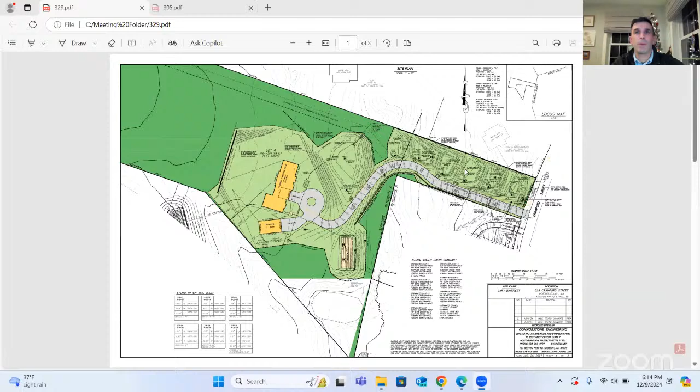So essentially from the last meeting, to address Vinny's comments, we've expanded up. Essentially, one of the biggest things we did was expand out a lot of these basins as they roll down the hill, so we can capture and infiltrate more runoff. So we have less runoff in the post-development conditions, far less than the existing condition, especially for the lower storms, the 2, 10, and 25-year storm.

We added in trench drains running across the driveway to help capture a lot of that runoff before it gets down to Crawford Street. Right now, these basins at the bottom, essentially the stormwater management system, will contain all runoff that flows to them through the 25-year storm. We begin to get some overflow during that 100-year storm.

We added in, just for reference, one of the comments the commission had, the driveway design from the abutting lot right down in there.

I think the only question I had was basically we updated the waiver list, and one of the waivers we had asked for on that list was about treatment for a portion of the driveway. This tail of the driveway right here does not flow to the drainage system, and it was noted in the review letter that treatment would technically be required. So we asked for a waiver from that standard for this particular portion of the driveway.

It's about 700 square feet, and it's designed essentially to sheet flow off into the grassed areas and then ultimately through the wooded areas. We still control the peak rate and volume of runoff in those directions. It's just treatment for that section of driveway.

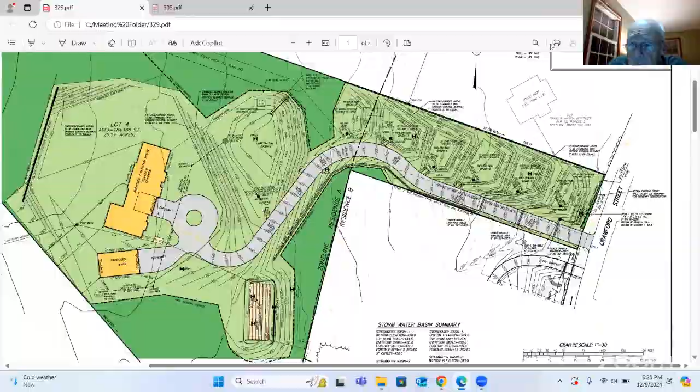Okay, so Vito, sounds like we're gonna continue this to January, yeah? Yep, that sounds fine. Great. We need a motion to continue the stormwater management permit for 329 Crawford Street to January. So moved. Is there a second? Second, second by Kelly. Roll call vote.

Justin Dufresne, yes. Todd Helwig, yes. John Johnson, yes. Kelly Marston, yes. And I vote yes. All right.

Well, thank you, have a good holiday, Vito. Thank you, you too. Well, I'll see you later. Good night. I have one at the end too. Okay, we'll see you then. All right.

Moving along to the NOI and stormwater management and land disturbance permit for Southwest Cutoff. I believe we have...

Mr. Lowell's with us, bring you in Robert. And Mark... I got a Mark Manganiello, LEC, yes. And Leslie Lombardi. Okay, Mark Manganiello, is there... Yep, Mark's coming in, Leslie's coming in. I think you should do that's it. There we go, gang's all here. Okay.

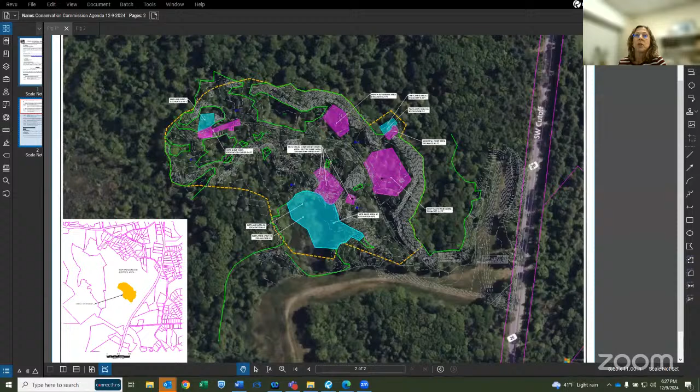And at that, I will turn it over to Mark. Mark, do you want me to leave this up or do you want to share? I'll share mine if I could. Okay, yep. I'm Mark Manganiello with LEC Environmental Consultants. I'm just going to get this screen going here. That work okay? Yes, I can see it now.

So just backing up a little bit to orient the commission and any abutters who might be watching: this is Route 20 here, this is the flood control berm you may be familiar with, Tomblin Hill Road, Davis Street to the north. The site is in this general area here. It's part of about 200 acres, as Rob indicated, a flood control area - this larger property that includes this flood control berm structure.

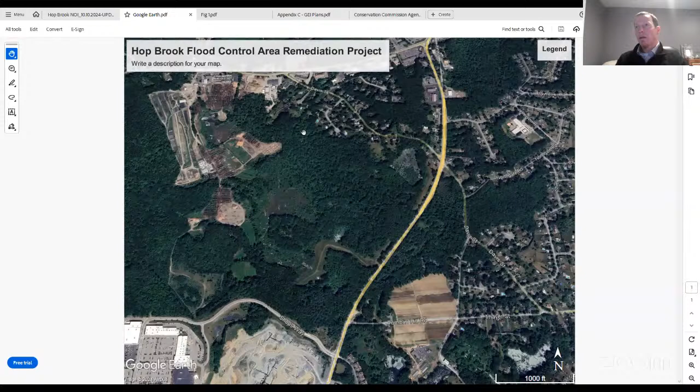Back to Leslie's graphic here, just to touch on wetland resource areas associated with this project - there's bordering vegetated wetlands, which were delineated in the field by LEC. That is this boundary that extends around the perimeter of this area, like so, extends off site here and then back on site here and back over this way.

So there's BVW. Mark, could you blow it up just a little bit? Sure, let's see. How's that? That's good, that's a little better.

There are also several isolated vegetated wetlands you can see on here, these small green outline polygons. Really the landscape in this area - you can also see some of the topography contours in here, they're kind of light on this but you'll see them on other graphics. The landscape has been heavily disturbed over the years as a result of the historic use of the property, so there really aren't any natural wetlands in here. These are all man-made features within the perimeter of this work area.

This area is also in bordering land subject to flooding, and one or two of the wetlands have been identified as containing potential vernal pools. The total amount of work involves 33,000 square feet of soil removal in bordering vegetated wetland, 66,000 square feet in BLSF, and 41,000 in buffer zone. The work areas are divided into 5 areas of contaminated soil and groundwater and removal of debris as required in the MCP. As Leslie alluded to, I'm going to pull up the site plan now.

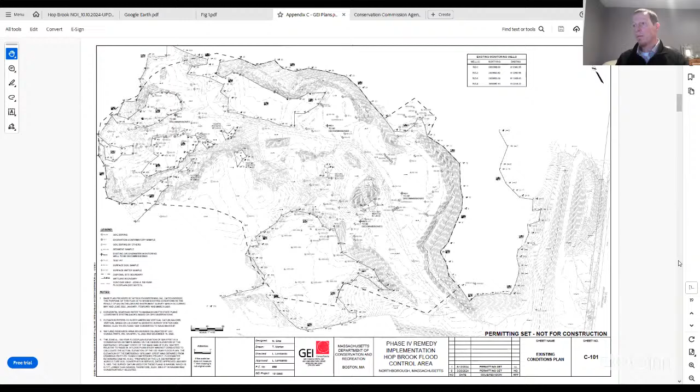This is a similar graphic to the one we were just looking at. These are the same polygons that had color in the previous graphic, showing areas of excavation, contamination, and proposed excavation. They're broken down as the wire dump area, the municipal dump area, electrical component, debris and bottle dump area, and north and south burn areas. Each one is labeled with square footage, depth of excavation, volume of soil to be removed, etc.

The largest area in your jurisdiction is wetland 3, about 28,000 square feet of wetland disturbance. Most of the excavation is down to a depth of 1 foot, with a couple of small pockets a little deeper than that.

The plan is for excavated soils to be temporarily stockpiled on site before being transported off-site. A portion will be treated in situ for lead toxicity through a process that involves mixing contaminated soil with a binding agent to immobilize the lead. The soil is then tested and excavated for transport off-site.

With the extensive amount of work in wetlands, measures to carefully manage water during construction were incorporated into the plan. There's extensive information in the plans regarding construction methods, including a plan to perform wetland excavation during the drier summer months to minimize disturbance from water. There will also be timber swamp mats for excavation in wetlands in Area 3, dewatering plans, and a water treatment system if necessary.

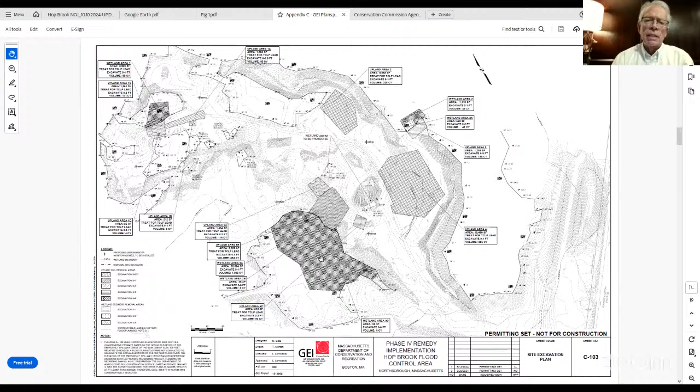That could have been it, my best guess. There was no equipment, it was just several guys standing around. Yeah, they may be looking at wetlands as well too, at the same time. Okay good. Yeah, Greg, you said it was Davey Tree, so there was an identification of emerald ash borer in that area.

So I think they were out looking at trees, looking for the emerald ash borer and possibly the Asian longhorn beetle. Davey Tree has been around the water, around town, all the areas around central Mass for years, looking at the longhorn beetle. And there was a sighting of, oh no, not the emerald ash borer, the spotted lanternfly.

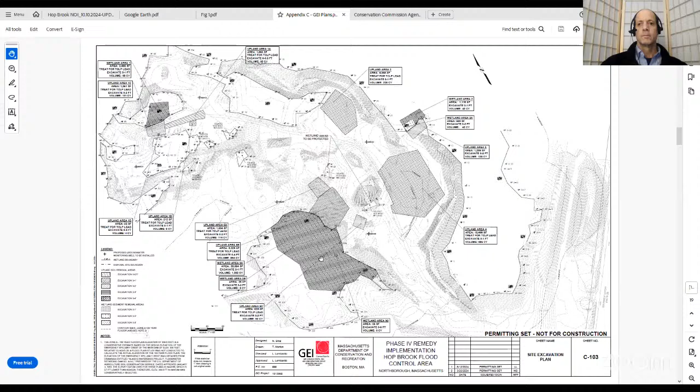That's the bug of concern this time. I just wondered, knowing this was on the agenda, I wasn't sure if it was related or not, so that's fine. Okay, I've got hands up in the audience.

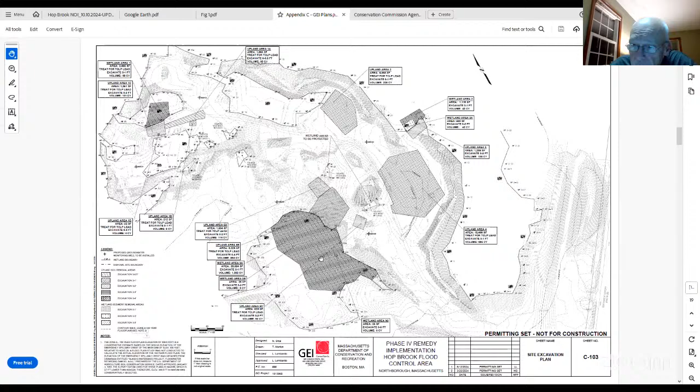Lisa Maselli. Lisa, I'm going to have you talk. Lisa, you there? Making some sounds, can you hear me now? Yes, we can hear you.

Hi, how are you? We're well. I'm supposed to be your liaison. It's been a while since I've been here, so I'm interested in the deed restriction that you talked about and keeping it. Is this going to be just used for recreation use and never again for residential, commercial, or industrial use?

Correct. Yeah, it was actually purchased for flood control purposes, so there was really never supposed to be any development on it. This was a pre-existing use when the state bought the property, the auto parts. But there are no plans for future development.

The restriction is for new drinking water wells, and Leslie could be more specific about that. But it's really about future uses of the area that we're cleaning up, which will be suited for woodland. It'll be fine for passive recreation, but it's not suitable for redevelopment. The cleanup criteria we're using does not meet residential criteria, but it's suitable for a passive recreational use.

So the deed restriction will restrict residential uses of that portion of the property. But just residential, won't it take commercial and industrial into account? When it was residential, it would cover all categories, Lisa. There will be no development here for sure. It's not meant to be a loophole to allow industrial.

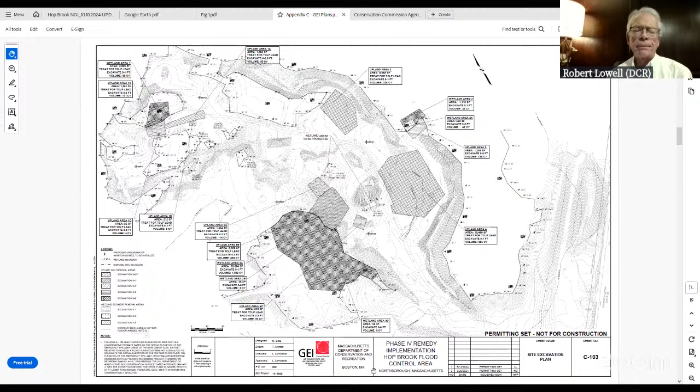Okay, that's right, because you don't really notice anything there since you're driving. There's a down gate, and then you'll see a grassy area. We keep it mowed all the time, but that's really the only activity there is the mowing. And there's a small pull-off there too, where a couple cars could pull off into.

You notice that? Okay, so it's on the west side of Southwest Cutoff. Yes, it is, on the way to Shrewsbury. Yeah, because it looks like there's a green gate of some sort, and then a big berm. That's right. That's a very attractive area when it's all green.

All right, great. I'm glad I tuned in—there's a lot of interesting things going on. Getting this taken care of is lovely. Thank you. Super, you all set with your question here? I am, thank you. Okie doke.

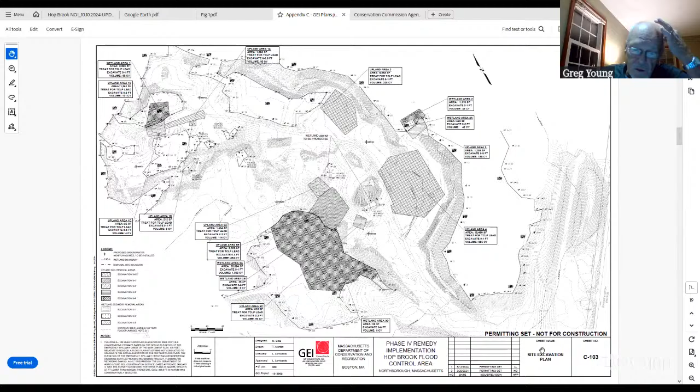All right, no other hands up, I see. Okay. So Vinny, if we have no other issues, we can move ahead to close the hearing and take a vote. That's correct, we close the hearing and then move on. Yep, I'll take one more look here since we had some putters. I don't see any hands up.

Okay, need a motion to close the hearing on the NOI and stormwater management land disturbance permit for 150 Southwest Cutoff. So moved. Is there a second? Second by Justin. Roll call: Justin Dufresne, yes. Todd Helwig, yes. John Johnson, yes. Kelly Marston, yes. And I vote yes. Hearing is now closed. Now we need a motion to issue a notice of intent.

Vinny, any special conditions on the NOI or the order? No, we just have our typical 25 or so conditions in our orders of conditions, and the permit has, I think, 17, but there are a lot of repeats. I don't see that we have any other—I didn't make any notes that we had any other conditions that needed to be applied to this.

There's no erosion control reporting devices here because we're in the wetlands we're working in, so—well, there will be erosion control or sediment control devices going up on the perimeter. So one of the conditions is our typical one: they have to be inspected and approved prior, before any other work occurs, and they can't be removed until the upland area is stabilized and approved. But that's one of our standard ones.

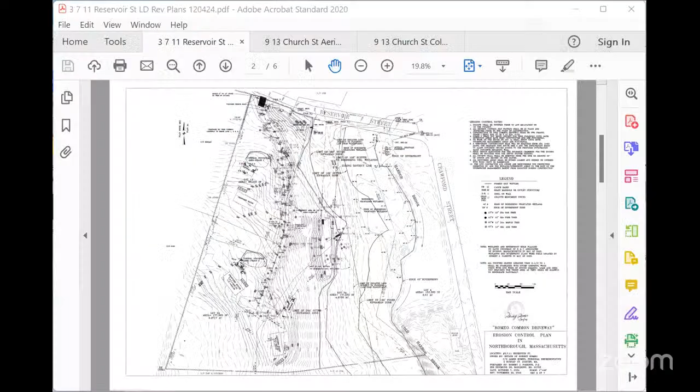So while you're doing this, some recapping from last month - I think there were a lot of outstanding questions that needed work done. Yes. So in the past couple weeks, I've cleaned up the drawings and I basically took the drainage information, the catch basins, the manholes, and put them onto the profile sheet, which helps clarify the grading plan a little bit. It was pretty confusing, and the grading, manholes and catch basins were coming out very light, so I transferred all that information above the profile sheet to help with clarity for everybody - for DPW reviewing it and Vin's review of it.

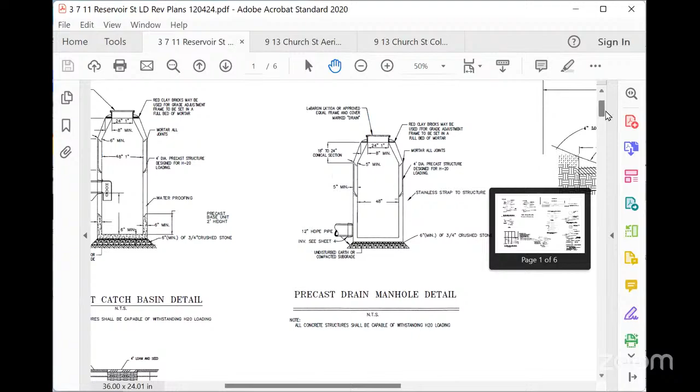Which sheet do you want, Bob? Maybe the erosion control sheet, Vin, we start with. Okay. This is the profile sheet, correct. Yep. You want to just explain the profile sheet?

Sure. So on the left side of the profile around Station Zero, there's the edge of pavement for Reservoir Street. So in order to comply with the planning board elevations - I think they have a limit of 6% coming in off the road - I got 5.99% on the profile coming in. Then we changed the grade with a little vertical curve to go to 7.2%, which is a little bit under their maximum grade, but it works pretty well with our profile with the existing center line grades.

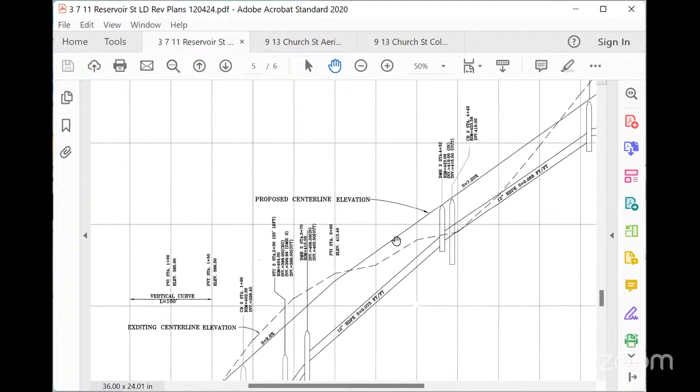I think it works with a little bit of cut in the 150-foot range there, but then we go to a fill section at about Station 4, where drain manhole number 2 is, I think. Yep, so we got a little bit of a 4 or 5 foot fill section in there.

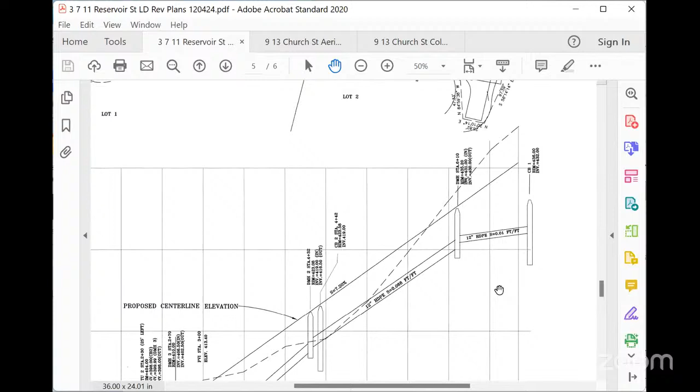All the drainage pipes are shown a little bit clearer on this sheet. There's one catch basin - the last catch basin on the far right of the profile sheet - that's actually in the turnaround for the common driveway, so we're collecting all the pavement runoff. So this drainage system is designed to catch the runoff from the driveway and anything from the lots that's not going into the recharge structures for the houses.

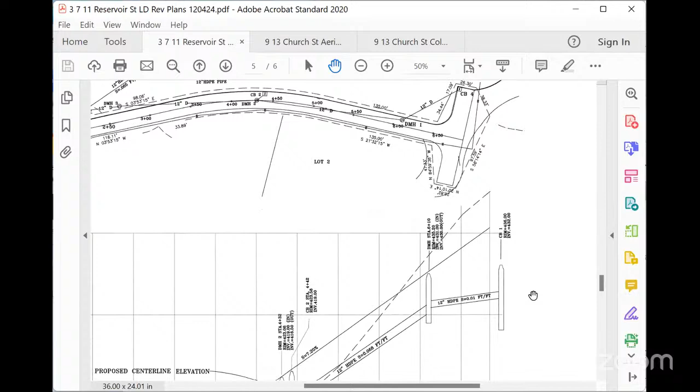We do have schematic or concept locations for our recharge for the Cultecs in front of the houses. They're not 100% designed, but I think LBAG has allowed for enough volume for the 25-year storm in those house recharge systems.

I think Vin had a question whether it would affect the septic systems. The soil perked pretty well up there - all the soil testing is done, so the recharge for each house will help reduce our volume that we need for our detention ponds.

There's a small detention pond up front - I think we talked about it, right near Reservoir Street here. The driveway comes up, is proposed to come up here with a detention basin in this area. And then there's the first house development there in this area - house with a driveway.

Septic system, yep. So we did show all the houses, the grading for the driveways for the houses - I kind of worked it out just to get an idea how much land we would disturb. I know Vin had a comment - I think I showed 2.5 acres originally, but that was more or less for the driveway and the 2 detention ponds. So I've estimated about 30,000 square feet of land disturbance for each house, so our total land disturbance is about 4.5 acres, according to my estimation.

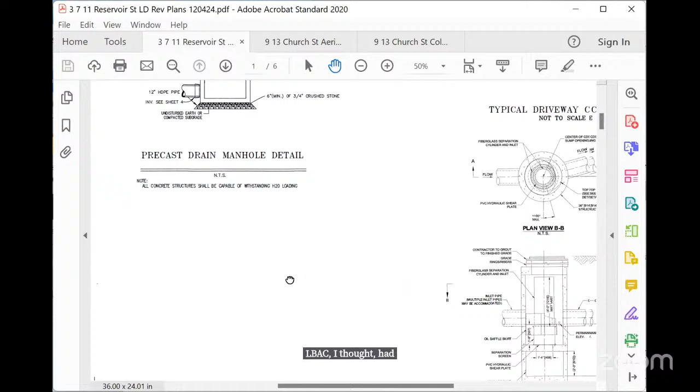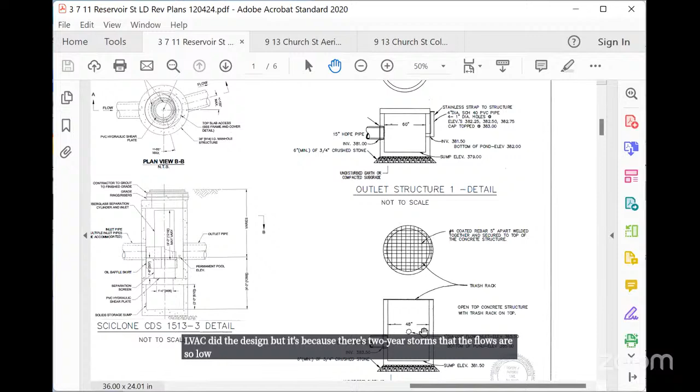I did add details. I don't know how much time you had to look at it, but I added the details of the outlet structures because they weren't in LBAG's report. I thought they were in there, but I did not see them. So there's two pretty much manhole structures with 4-inch pipes with holes in them. The reason I think they're 4-inch pipes, and LBAG did the design, is because in 2-year storms the flows are so low that that's just the way it's got to be. So if we did get a big storm, the water would just go into the top of these two structures, one in the middle of each pond, the infiltration basin and the detention pond out front.

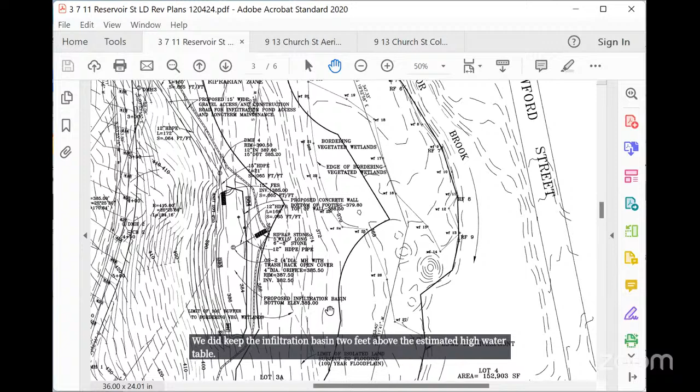So those details, I think, work pretty well. We did keep the infiltration basin 2 feet above the estimated high water table. I had hand dug a couple holes in the detention pond area, got down about 42 inches with a post hole digger about a year ago. I think those holes, I just covered them up with some brush and stuff, so they're probably still visible if anybody wanted to see them. But I think LBAG has done a good job keeping the elevations to where everybody will be happy with the final product.

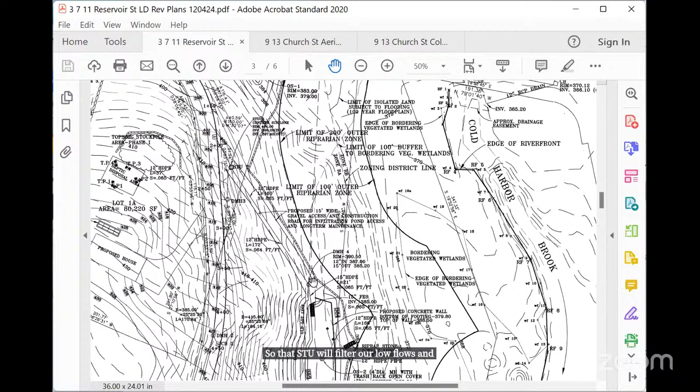Now, we do have a pipe that comes from our driveway to feed the detention pond. So from the drain manhole, we have an STU, a stormwater treatment unit, just off the edge of the roadway where the cursor is right now, STU 2, I think we're calling that one. That STU will filter our low flows and keep the silt out in accordance with the stormwater regs, and then we will drain to drain manhole 4, which just changes the direction a little bit, and we'll put another 15-inch pipe and let it discharge into the detention pond.

So that length of pipe will be our construction access to the pond, because we're going to end up pouring concrete for the concrete wall. And that construction road will have to stay, I think, for further maintenance. I think that's just going to end up staying a gravel road.

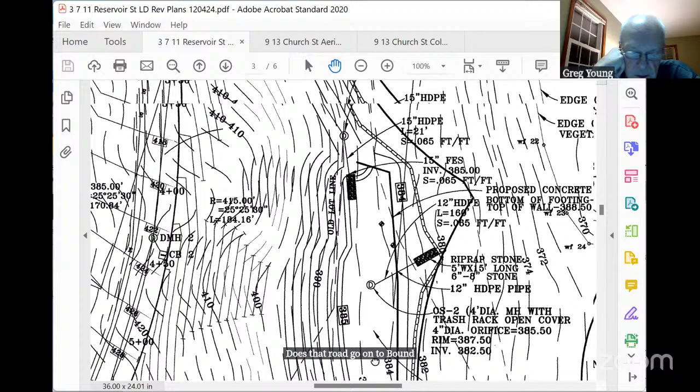Does that road go on to Boundary Street? I'm sorry, Reservoir Street? No, it's going to go up to our common driveway, just on the north side of drain manhole 3, maybe around station 2+00. I think those grades work pretty well, and it's not a crazy slope. It's probably a 9 or 10% slope.

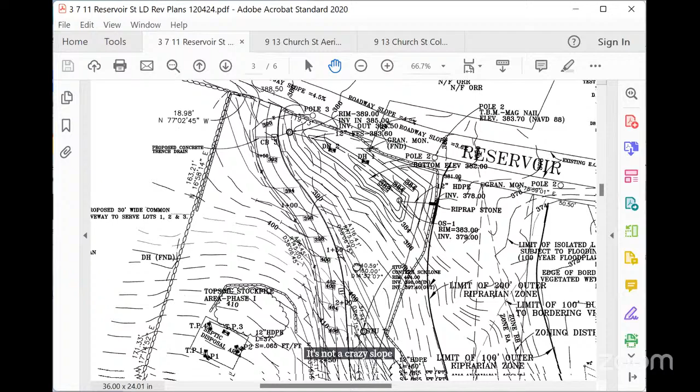So it's easily accessible. I think with those 4-inch low flow drains, maintenance will be maybe a little more required than some of these other larger ponds that just have a 12-inch pipe going out. I think the folks that live here are going to have to keep an eye on it.

Vinny, that brings up a point about folks keeping an eye on things. We don't have a great history with that. You probably want to have some sort of HOA involved here, right? Yes, the planning board has already requested that. Great. I'm hoping to get legal help with this thing to get that HOA paperwork in front of the planning board for review.

I did have a detention pond in my backyard in Marlboro, and I used to cut the grass in it with a rider mower. So this one should not be grass, the big one should not be grass. It should be basically a gravel bottom when it's done. The concrete wall, 12 inches high?

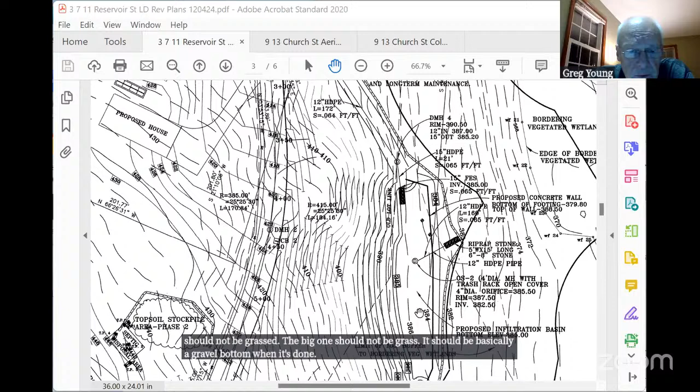Excuse me, the height of the concrete wall, yes, basically just to create our storage. So if I tried to grade out a berm, I would be going into the 200-foot line, so I would prefer this 6-1 option. I think cost-wise it's kind of a wash, only because it's basically just a house foundation wall when it's done.

And it does make us look better with the Conservation Commission, as far as not cutting more trees adjacent in the 200-foot zone.

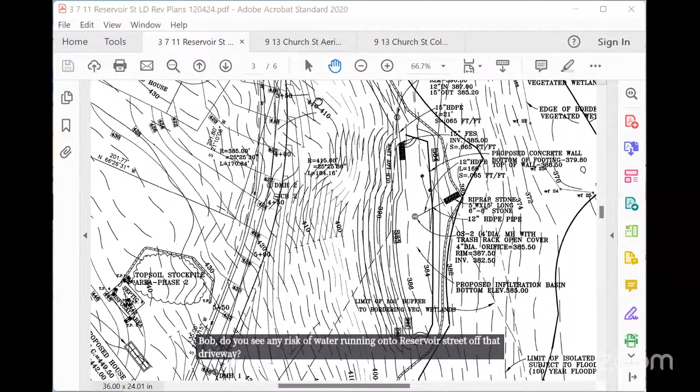Bob, do you see any risk of water running onto Reservoir Street off that driveway? So the catch basins, I did do a little catch basin analysis for DPW and for Vin, so we can collect all the water.

We did add a trench drain. So we have catch basin number 3 down about 30 feet off the edge of pavement, and I also added a trench drain. That one shows it in front, but it's actually going to be 5 feet to the north, so that anything that might go by that catch basin will get caught in the trench drain.

And then that D symbol on that plan is the other treatment unit that we'll have to purchase and put in. Okay.

Vinny, comments? You still need to do some analysis, yes? Oh, yeah. I got this I think last week, maybe Thursday or so, but yeah, I still have to look at it.

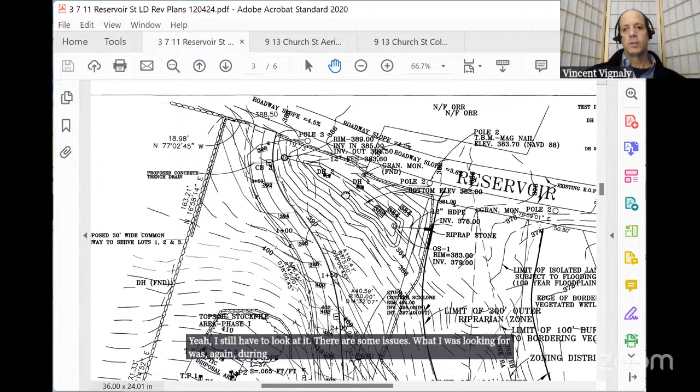There are some issues. What I was looking for was, again, during construction, how much needs to get protected, having temporary sediment storage so that before all these drain systems get put in, you're just going to have a cut road going up the slope. So we want to put controls in there so you don't get dirty water coming out into the street. You're going to divert it out to the basin on the side.

So that proposed basin out by Reservoir Street is pretty much a natural low area, so we can direct water there during construction. I don't think it's going to take much to do that. The topo is already kind of pushing it that way.

Right, and I just have to confirm it is. I think it can work, just have to go through and make it work. You have to build a little berm on this side, but this isn't an infiltration basin in the future, it's just detention. So it's allowed to be used as a trap for temporary sediment control.

Okay, so we are going to continue this meeting, Vinny, so you can get a chance. That is correct, yes. Any questions from the commissioners? Any comments?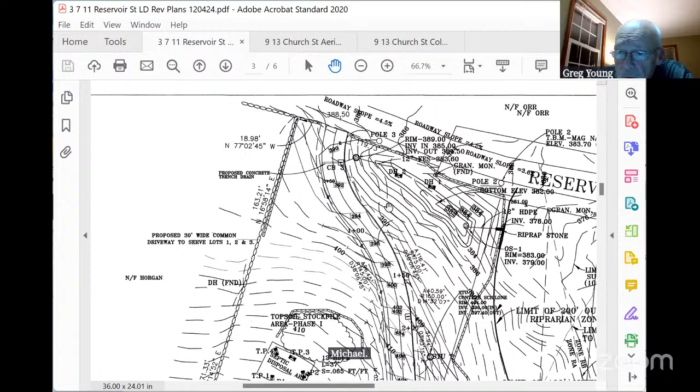Hi, am I on? You now are, we can hear you. Yes, sir, okay, thank you.

I'm at 17 Reservoir Street, we directly abut this particular project. Just a couple of questions or comments. The first is, this is a pretty long driveway. I'm curious where the snow storage is, where that's going to be plowed up to and stockpiled when we have a snowy winter, is that somewhere you have pre-designated, and where will that run off to?

That's not specifically located on the plans, but that's a good question. I think at the end of the turnaround, it's going to have to be plowed to the end of the turnaround up at the top of the hill. In the intermediate spots, the existing driveways are going to have to be plowed.

So most of the snow is probably going to have to be stored in each of the driveways, it'll windrow off to the sides as you plow it. But as far as when you get up to the end of the turnaround, it's kind of like a cul-de-sac, so that's going to just have to be pushed further up. The snow will drain onto this roadway, I think, as it melts, if that's your question.

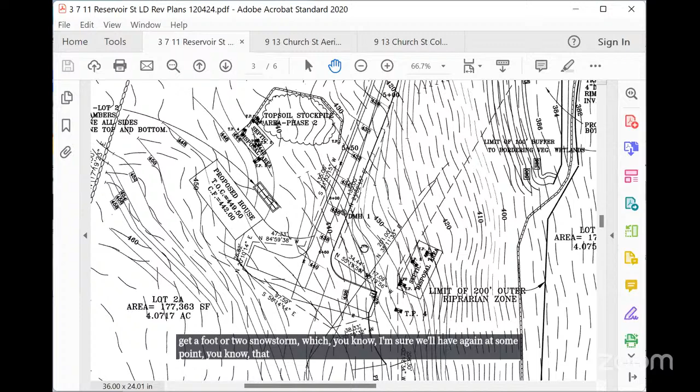It's a pretty long driveway, so I imagine there's going to be, if we get a foot or two snowstorm, which I'm sure we'll have again at some point, that can result in a fairly large stockpile of snow.

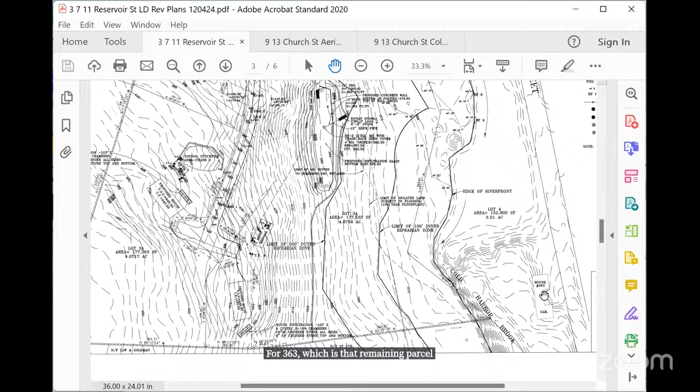I want to back up a little bit. These three parcels are being subdivided from 363 Crawford Street, but I really feel like it's missing the mark on what's happening with 363 Crawford Street itself. We contacted the health agent for 363, the remaining parcel with a house, and the town has no idea where the subsurface disposal system is on that property at all. That's a big unknown.

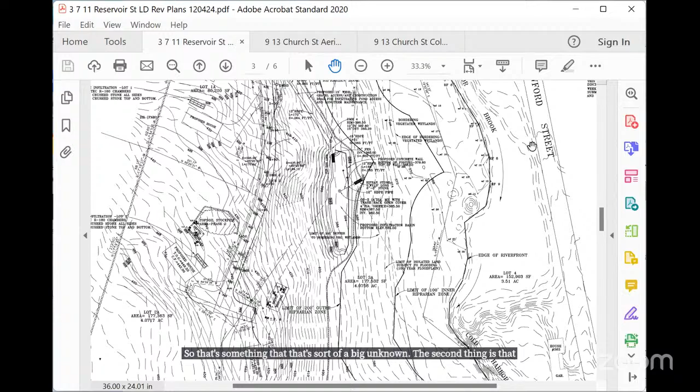I didn't do detailed engineering analysis, but I did go to the town GIS website, and it appeared there's no area outside the 100-foot buffer zone where, if that house is ever remodeled and needs a new septic system, it could go. It seems to be all within 100 feet of the wetlands, at least with the measuring tool on that GIS site. So I don't know what the actual requirements are for a septic system within 100 feet of a wetland or waterway.

We hear a lot about these three parcels, but I'm concerned with people ignoring 363, the original parcel, and what can be done with that property. I ask the board to consider these property lines and the potential of the work, and not get too narrowly focused on just the common driveway and the stormwater retention basins.

That's a good question, Mr. Horgan, but the existing house, no one is living there right now, so if they wanted to upgrade the septic, they'd have to do new soil testing with the Board of Health. I don't know where the existing cesspool is, but if they want to occupy or sell that house, they'll need a new septic designed to best maximum feasible compliance. By state code, the septic system can be within 50 feet of wetlands, but there's floodplain over there too.

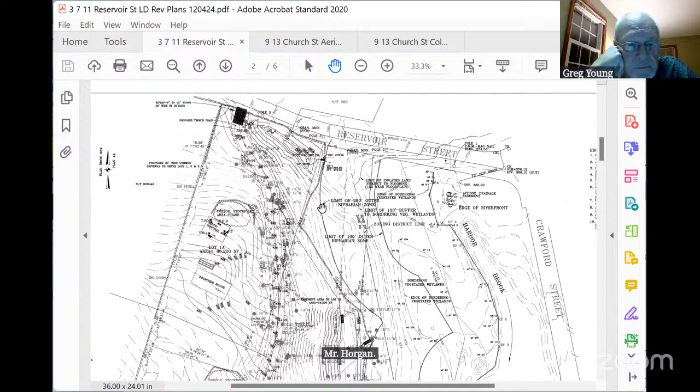Well, Mr. Horgan, you will be notified. If that piece of property were to be developed, it would be an entirely different filing, and all the neighbors and abutters would be re-invited.

I understand that, but again, it's like subdividing land without consideration of the original parcel and what might happen. I think it's something that would likely come back before the board, and they'll say, hey, these property lines are already in place, we're stuck, you have to give us a waiver. So I think it's something that really was not properly addressed. I don't know when these property lines were originally delineated — we were not involved in that, and we were never notified of it.

I do think that has to be part of this consideration, as an entire corner property with 363 Crawford Street, 3 Reservoir Street, and whatever the other numbers are. We shouldn't narrow our focus on just one thing — there's a potential for an abandoned home or property, or the town becoming liable. It's going to be a mess if you can't locate a septic system and do anything with that property.

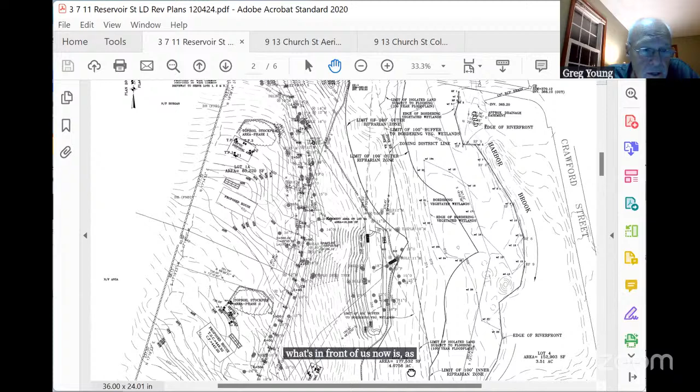What's in front of us now is, as somebody said, a stormwater management land disturbance permit for the 3 lots we've been talking about. The 4th lot, 363 Crawford, is totally out of scope. If at some point that becomes in scope, then we'd be involved in that one.

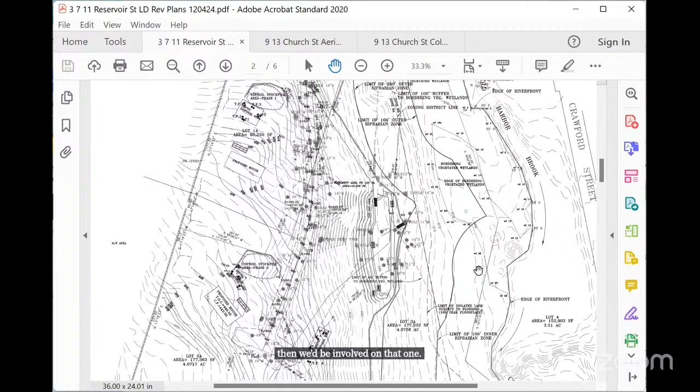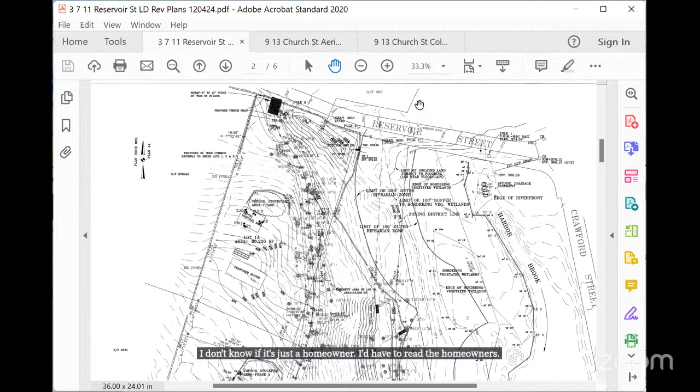The storm basins will be maintained by the builder, until the homeowners—I don't know if it's just the homeowner or the homeowners' association. I'd have to read the homeowners association paperwork, which we don't have yet. We're going to submit that to the planning board.

So the owner of the property would be responsible for the maintenance of the detention ponds—the current owner? Yeah, if the ponds were built right now, yeah, but they're not built yet. Okay. I don't think the current owner has the ability to build this. Okay, thank you for clarifying that.

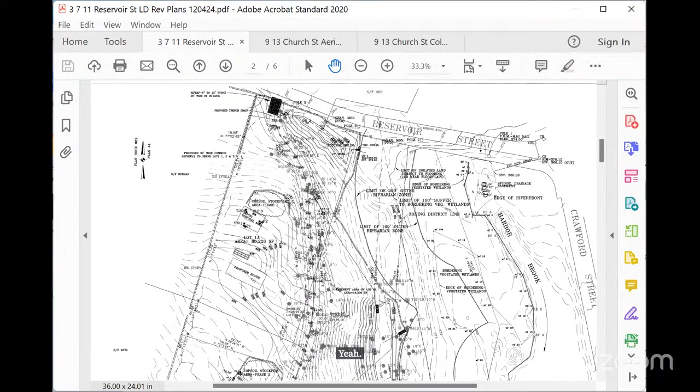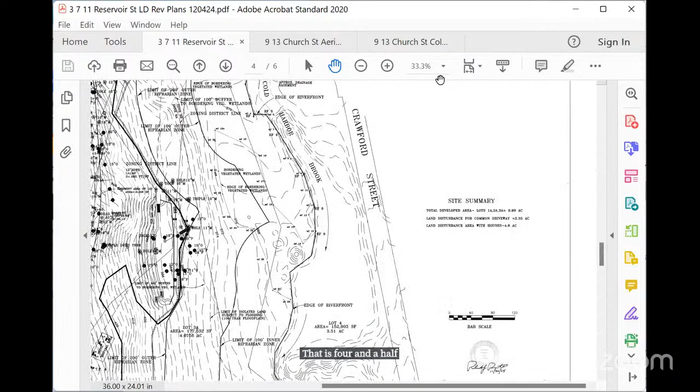Anything else, sir? Yeah, I'm also wondering—if you could scroll down to the land disturbance, the other plan, a couple pages down, that one. That's significant land disturbance. I think you said close to 5 acres. That is 4.6 acres, I believe.

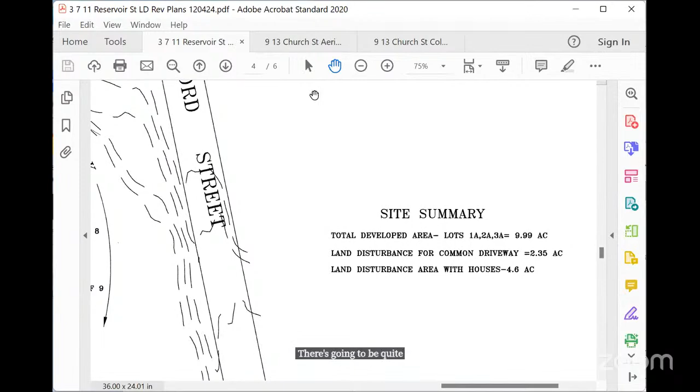4.6 acres. And how many large diameter trees are we talking about here? There's going to be quite a few. I counted 60 just for the common driveway itself. So what effect does that have on erosion, on water quality, on noise pollution from the highway? These are a lot of concerns this neighborhood has and would have. Well, that's basically why we're in front of the Conservation Commission.

To review the process and how this will be constructed. The idea of constructing this common driveway means this area will have no trees left, basically. When they come out, they may be able to save a couple, but generally the area within this outline is the area of alteration.

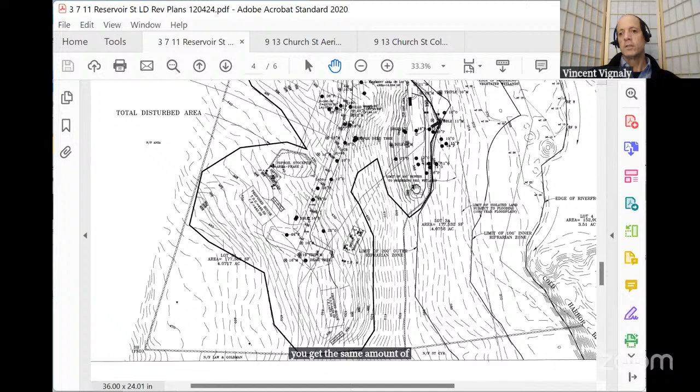Part of the bylaw in place in the town is to prevent erosion during construction from getting into the wetland resources, and also to address post-construction stormwater quality. The water will go into basins built to treat and infiltrate it, just as if it was a wooded site. You get the same amount of infiltration into this basin if it's designed and built correctly, as was the prior case, so the water quality is 80% of the existing water quality.

It meets the standard that you're treating 80% of the total suspended solids of the runoff coming off that property, and that's the state and local requirement. So that would be a 20% reduction in water quality compared to now? Yep.

And you're asking the residents to accept that reduction in quality? Well, I think we're over that. I think 80 is the minimum, because I think LBAG's report is up in the 90s. Does it go up to 90? I'd have to look at it again. I think so. Yeah, because that stormwater treatment unit does a tremendous job with the low flows.

I'm also curious, because you were talking about the runoff, in the event of a storm or snow, did those runoff calculations account for the land not having the current trees in place, or does that not factor in? Yeah, that's how they calculate things. They look at what exists now, establish a number, and then they look at what is going to be proposed in the end and have the final number.

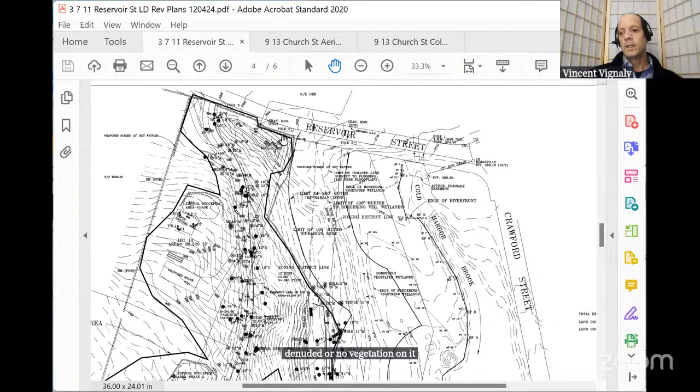But our bylaw also requires that if they have an area that's denuded or has no vegetation on it, there's also a number they need to address to store the volume of sediment that would run off a bare soil area. So they have to have all three of those things addressed. Okay, thank you.

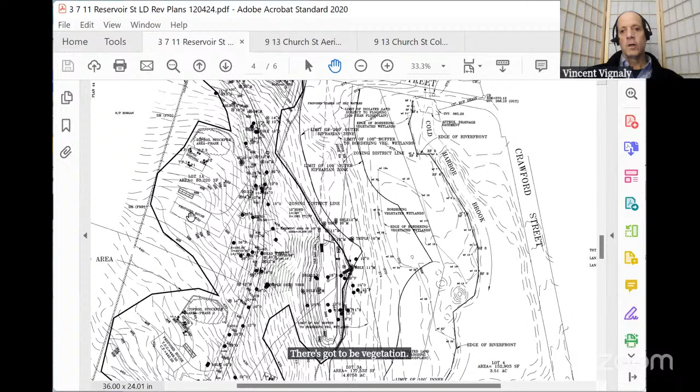Would there be any condition to replace a lot of that vegetation with native vegetation, for example? Yes. Part of our charge is that after construction is done, everything has to be stabilized with vegetation, whatever's not pavement or house roof. There's got to be vegetation, whether it's lawn or something else - that's kind of up to them - but native vegetation is also required in the basins and in the detention area.

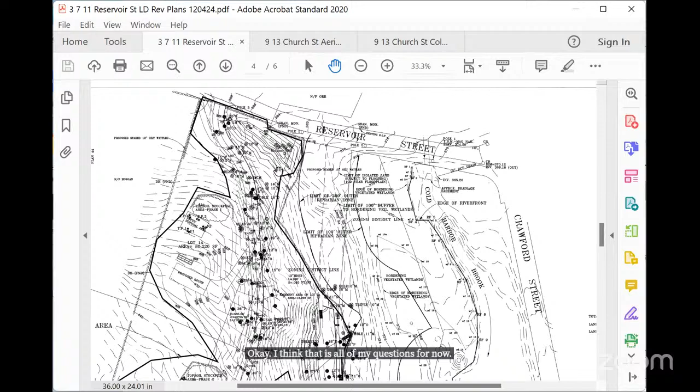I think that is all of my questions for now. Thank you very much. Okay, certainly. As we're going to find out, this will be continued again, so next month we'll be back here. Anything that comes up, you're welcome to join that meeting too.

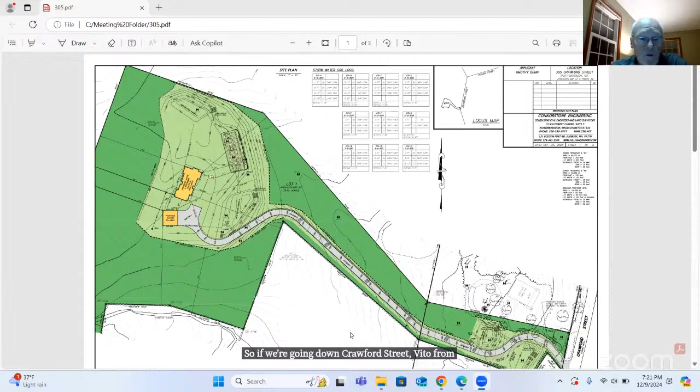These 4-lot ANRs, this is the last one of the bunch to have the application submitted, along with 311, 317, and 329 that was on earlier today. Going down Crawford Street from Northborough toward 290, this is the first lot on the left.

This has the existing driveway on it. I'll zoom in. That existing house that was torn down is right there, and the driveway actually comes in off of this lot. Right now it comes up and then hooks over into the other lot where they took the house down, 311.

So this is that first one that you see. I think right now the sign is actually for that other lot, but there's a sign out in front of this one too.

Vinny, I actually didn't get the full plans back yet, so I was waiting until after this meeting. I'll get those after the meeting.

This one is 5.75 acres, and we have a disturbance area of about 95,000 square feet, so a little over 2 acres. That, in combination with the 4 lots, triggered the application filing.

Right now it's essentially undisturbed in the upper portions of the lot. Down at the front it contains the existing driveway and just some minor development, a little bit of clearing. The house itself is off-site on the other abutting lot.

As far as stormwater goes, right now everything essentially drains down to Crawford Street. We do have some intermediate analysis points at this property line. Some of this flows down across the abutting property and ultimately onto Crawford, and also on this sideline it flows off-site onto number 311 and then ultimately to Crawford. So in our analysis we looked at this property line and the ultimate downstream point of Crawford Street.

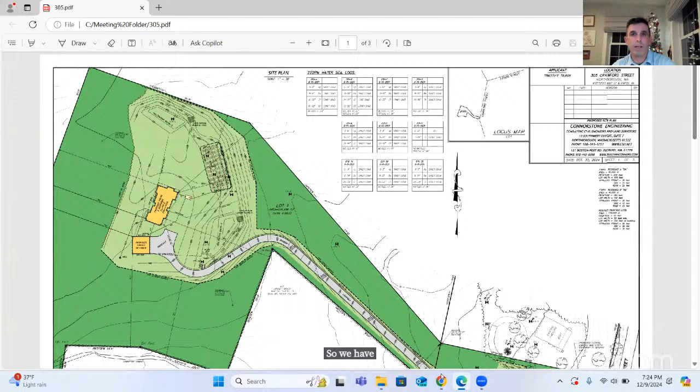We have a fairly long driveway leading down to Crawford. Just like the other ones, it's fairly steep, but it's the access to get up into that site. I don't have the exact number offhand, but it's approximately 500 feet, maybe a bit more using the bar scale, perhaps 700 feet. So it's a long driveway getting up there.

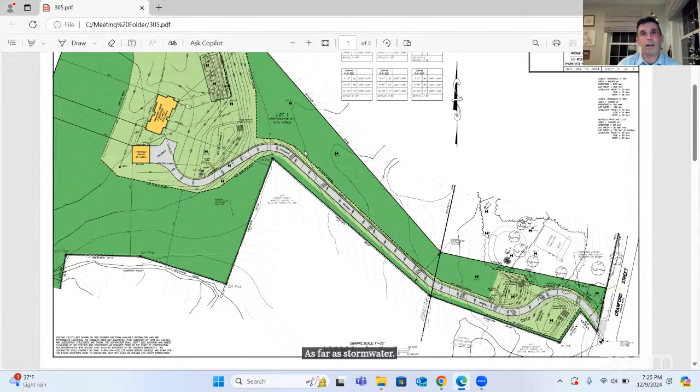That gets you up to the top, the buildable area in that upper section. As far as stormwater, we separated it into 2 areas, the top being the main building pad. We did a stormwater basin out in the back, which essentially catches all the yard areas, some of the rear roof, and a lot of the upgradient areas.

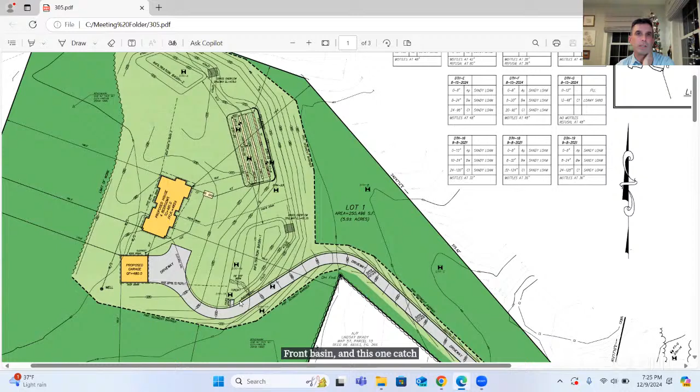It's an infiltration basin, and we put the bottom of basin 4 feet above seasonal high groundwater. Then we have a front basin that catches the front yard, front roofs, and this upper driveway area. Same thing here, we set the bottom up about 4 feet above groundwater, which provides all the infiltration and treatment for this upper area.

When we go down to the bottom of the driveway, we also have two basins down there. One collects this portion of the driveway right here, and a second one collects this portion of the driveway. Again, those infiltration basins were a little closer to groundwater but still compliant.

I think they were just over 2 feet of separation, and we did that to save on some grading in that area. At the base of the driveway, the intent was just to use the existing driveway layout that's down there, so we left that in the existing condition and matched it in the proposed design, basically leaving it as-is.

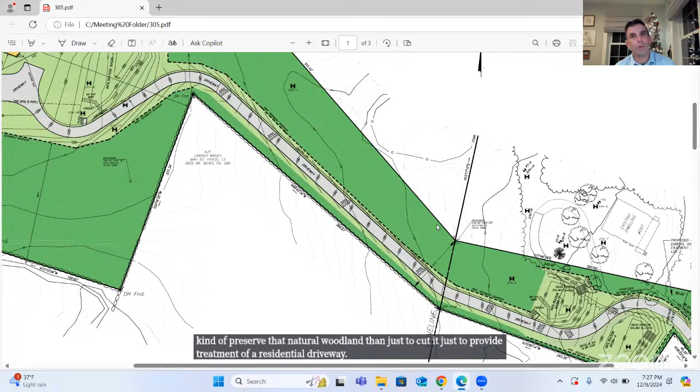For the central portion of the driveway, this middle section, we were planning to let that sheet flow off the edge and filter through the natural woodland, rather than cutting it, since we didn't need that for pre-post control of runoff—it would only be for treatment purposes. We felt it would be better to preserve that natural woodland than cut it just to provide treatment of a residential driveway. Our pre and post analysis didn't require basins in that area.

So let's see if there's anything else. For waivers, we did have the typical waiver of work within the groundwater table, just because of the nature of the site. This one isn't as severe as some of the others—we don't have as much cut up top. Once we get up there we're pretty much on top of the hill, but we do have some cut in the backyard just to level it off, though it isn't severe. But we are closer to groundwater than the bylaw would allow, so we do ask for a waiver for that.

And the second waiver was for the treatment of the driveway in that middle section, and I guess also for that front portion as it gets down to the roadway.

And then I guess Vinny did have that letter. We're working through that—we went back and forth on a few items, but I owe him the full set of plans now with an outline of each comment. There were only a couple comments we were going back and forth on.

One I noticed was down at the entrance—I don't know if I can zoom in on that any better. So down at the entrance, where it's an existing driveway, we actually didn't need a permit from DPW, so the only regulations were meeting the stormwater bylaw.

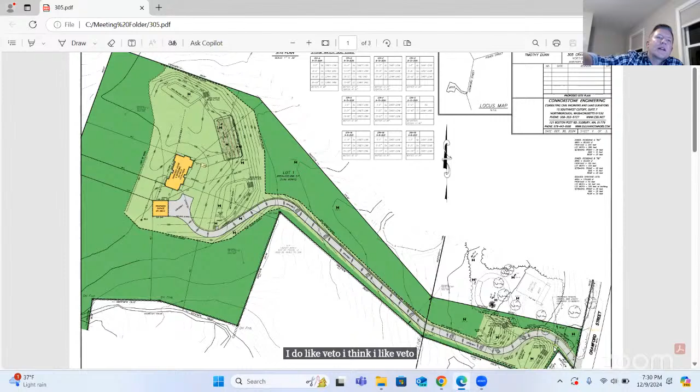Okay, I don't see any. I do like, letting that driveway kind of flow into that natural buffer right there, I think will be pretty good for this one, instead of just clear cutting all those trees and creating that many pockets.

The only thing I'd say, which actually looks pretty good on the other side of the driveway, just be careful not to create any type of pockets on that other side of the driveway that would trap water and direct it down that other edge, where you could get a lot of erosion. But it looks like most of it would be graded, so it would still kind of continue across the driveway for the most part.

Maybe a little bit up where that cursor is - up there might be your only little pocket, but for the most part it looks like it'll continue across the driveway. Yeah, so we tried to make it at a slight cut on that side, except right in that corner. But you shouldn't get too much runoff right in that spot anyway, since it's flowing down and across.

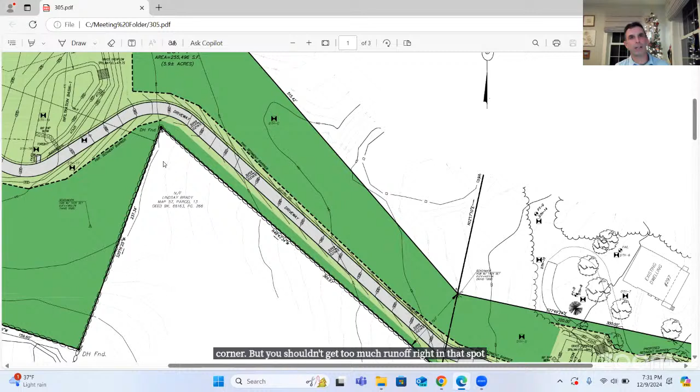You all set, Justin? You're good? Okay, nodding heads. Yep. All right, I don't see any hands up from attendees in the audience here.

Okay, so Vinny, we're going to continue this. We need a motion to continue the stormwater management and land disturbance permit for 305 Crawford Street to the January 13th meeting. So moved, by Todd. Is there a second? Second by Kelly. Roll call.

Justin Dufresne, Yes. Todd Helwig, Yes. Don Johnson, Yes. Kelly Marston, Yes. And I vote yes.

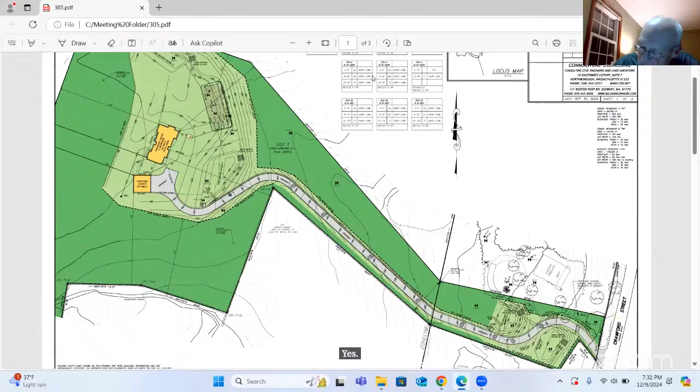All right, well thank you, I'll see you in a set month. Thank you, okay, have a nice Christmas. You too. Now we'll see you in January. Yep, all right, moving along here.

We have an NOI, a new NOI for 27 Belmont Street. Now, Vinny, this one's already requested a continuation, correct? Yes, this is for the motels, the old Motel 6 site.

Yes, they came in because they're replacing their septic system, and they found that they had to file under the notice of intent, weren't fully aware of the land disturbance permit application. So instead of trying to do two things, getting this one going and then doing the land disturbance, they're just holding this one until the next meeting.

So we want to continue this without any testimony. So in January, will they come in on the 13th meeting with an NOI application and a land disturbance application? Yes. Okay, all right, so we just want to vote this to continue the NOI for 27 Belmont Street to the January 13th meeting.

Make that motion. Is there a second? Second, by Kelly. Roll call. Justin Dufresne, Yes. Todd Helwig, Yes. Don Johnson, Yes. Kelly Marston, Yes. I vote yes. Okay, continued.

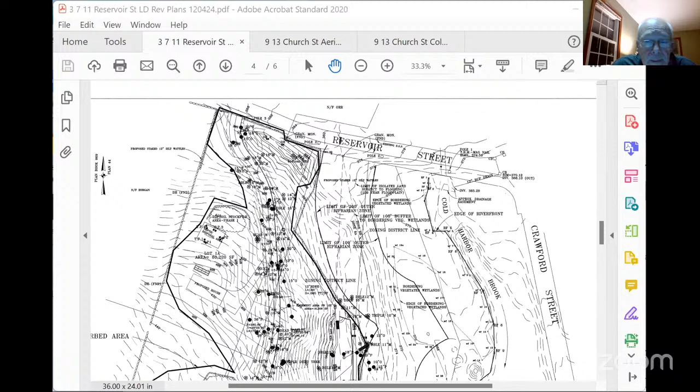Vinny, I've got a hand up from an R. Berg. Yes, yep, that's one of the applicants as well. Okay.

Very good, I'm just reading off the line here. There, no, okay, problem, very good. Thank you. Okay, so Vinny, why don't you set us up on this one, then we'll turn it over.

How's that? Well, actually, we've got a request for a determination for demolition work. I'll let Brian take the lead, I'll try to point to the right things as he's talking. Yeah, thanks, Vincent. We're here on behalf of, excuse me, LIK Northborough Realty.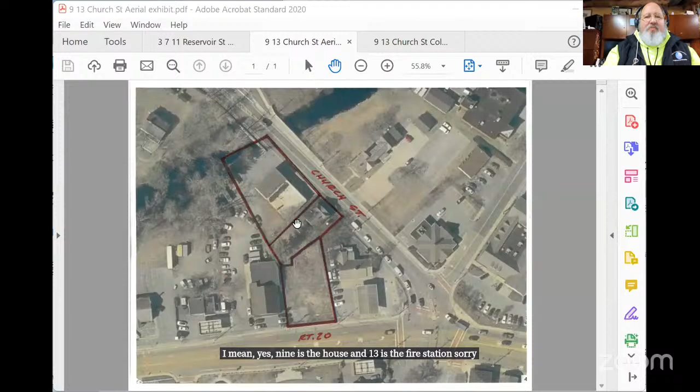The building to the north is number 9, the historic old fire station, and then there's an old single family home at 13. Sorry, 9 is the house and 13 is the fire station. And number 40 West Main is a vacant lot with a gravel parking area and an old foundation, covered in overgrowth right now.

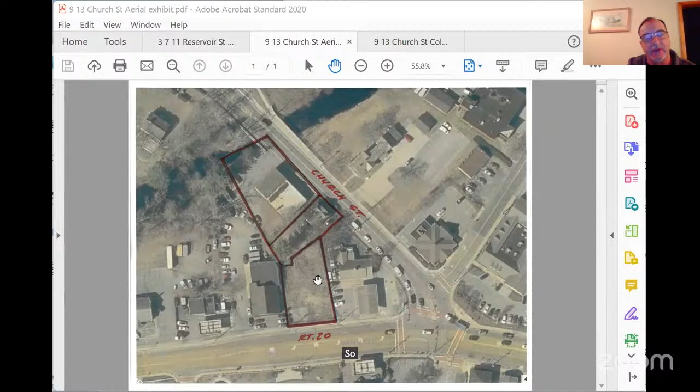So that is the general location plan. If we can go to the proposed site plan.

So the owner and applicant has a land development agreement with the town that was issued by the select board on August 16th of this year. Under that agreement is the demolition of the two buildings, the home at number 9 and the fire station at number 13, and that work has to be completed within 6 months of the issue of the permit on August 16th.

So the idea is Capital Environmental, doing the environmental cleanup and demolition, would generally access the site at the construction entrance just to the south of number 9, and access the rear of the fire station building - where Vinny's hand is - and then demolish the building into itself, away from the brook, so everything will be collapsed into the building.

There's a question about stockpiling, but the idea is the material, as it's brought down, would be loaded into trucks and taken off site to a disposal facility. Robert could expand on it further, but I believe there is some asbestos contained within the building, so that will be removed and disposed of under state regulations.

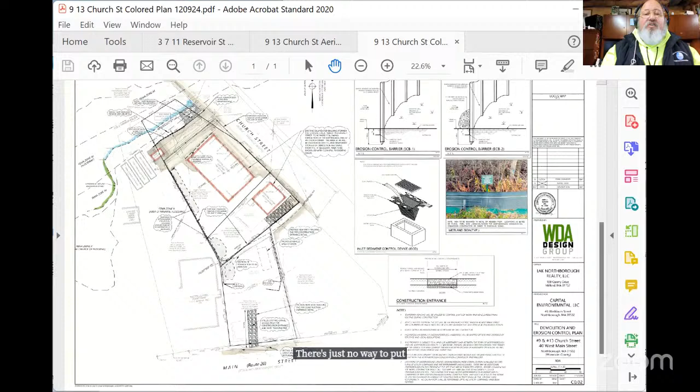So the 3 or 4 bay side, single story, is conventional - labor goes in, removes it, builds a containment, takes it out. The other side, the 2-story, will be brought down into itself and trucked away as all the material being asbestos, even though it's just wallboard - not the brick, not the block, not the roof. It's just the wallboard that tested positive, but there's just no way to put labor on that second floor to do it safely.

I don't know if anybody's been by there - when we went up to sample the roof, you can look right into the building from the roof. We've been by there a couple of times doing site inspections and so forth, but we can't see up that high. It looks fine from the ground.

The good news is the roof tested negative. That's good news. The test is negative, that is good news.

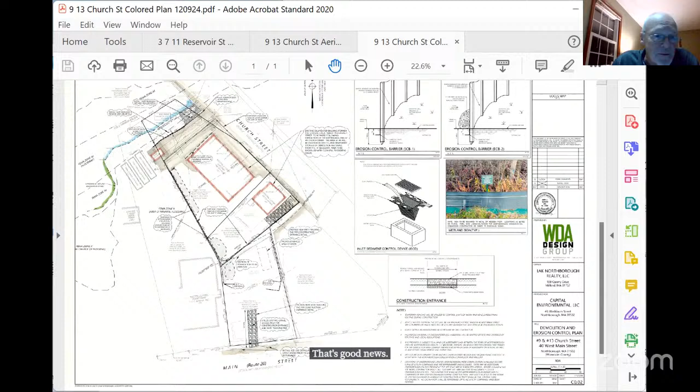Okay, Brian, this is an RDA just for the demolition. That is it, there's nothing beyond that. Correct. They're part of the land development agreement is they do the demolition and leave it as a pad site. And then within 18 months of that permit, they can apply for a multi-use, and that has to be fully permitted within 18 months from the date of that agreement.

So there's going to be no fill. They're going to be demoing the buildings and just returning that to grade. As you've seen, this is a flat site across it, it varies in elevation of only 2 feet. So it'll be left as a pad site.

All that material will be removed off site, and then that'll be graded to existing grade. Vincent had asked if we could show a couple of temporary settling basins if they're required. We don't think with the way this site is going to be handled and the grades that'll remain, and the stabilized area, that we'll probably need them, but we are showing some areas there. And then we added another gravel access area that Vincent requested, a tracking area, as there will be some vehicle access likely through that section as well.

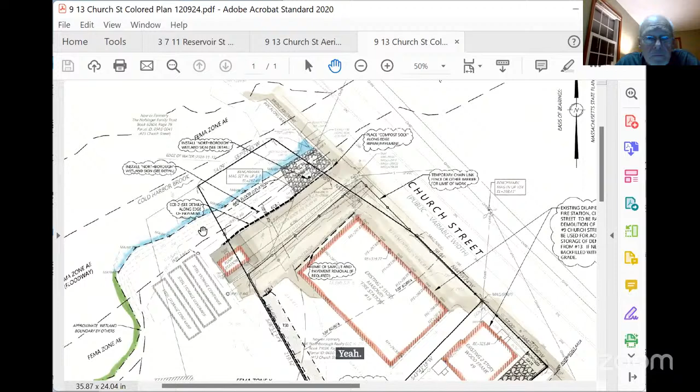And we haven't decided whether there are wetlands there or not, because there were no plants growing, so we're going to wait for the notice of intent to determine the actual delineations of the resource area. But there's the floodplain, top of bank that's known, and they're keeping all their work way over here, which is beyond either of them. So it's not a problem, and they've got the barrier in place. So I think this should work out well. And it is very flat, as people have said.

Any questions, comments, concerns from the commission? Yeah, we're talking RDA here. So the 100-foot line goes through the building, right? Yes, the 100-foot riverfront area? Yes. I guess the question is, I don't care all that much, but if you were to build this building, you would need an order of conditions. So why do you not need an order of conditions to bring it down when most of it is located in the buffer zone?

It's under the Rivers Protection Act. It's a grandfathered clause. If you're not filling or dredging or altering that, that's why this would be filed as an RDA under that exemption. But any future work, they're gonna have to file a notice of intent, address stormwater and everything else that goes along with it.

So this RDA is filed under that exemption just for the demolition work. Any future work, you're right, it's going to require a full notice of intent.

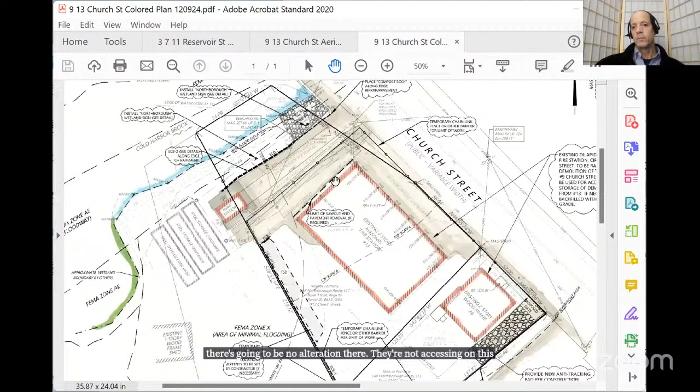Correct, so it's not coming close. And that's why an RDA is all that's needed. I'm going to be fine with it ultimately because the protections we're doing are the same as we would have been doing if they did it under an order of conditions, right? But I just don't get why we're doing it this way. It's fine, I'll leave it at that.

Okay, anybody else? Any more questions, comments, concerns from the commission? I see the fence up. Is that going to stay up then for the next, call it 18 months or so, until something's permitted here?

No, it would stay up until we get the building down and bring it back up to grade. So I guess for 18 months, the site's just going to be left with a little bit of pavement on it, and then whatever growth kind of grows out here. Will it be maintained over these 18 months? I'm sure if the commission wants the landowner to keep any overgrowth in the backfill down, that would not be an issue.

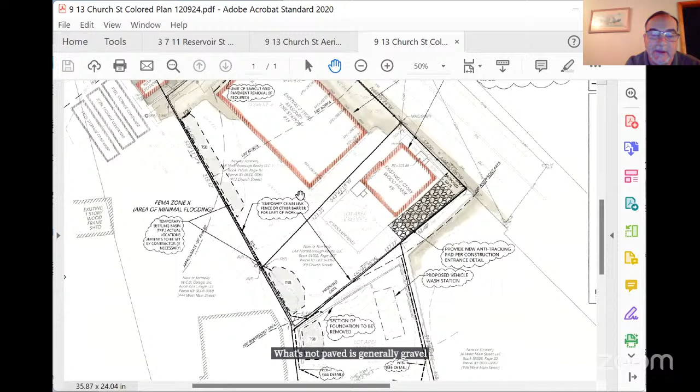Justin, there's quite a bit of shrub and weeds on the back. What's not paved is generally hard packed gravel right now, but there are weeds and shrubs growing out of it. That R&T Furniture site has been overgrown for years since it burned down. There's not a whole lot there, real scenic.

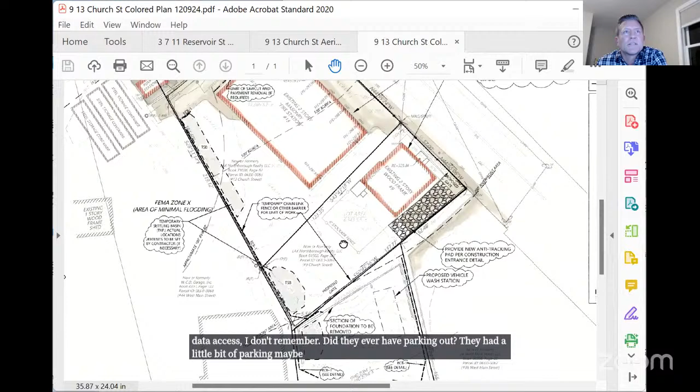The only thing I'd caution on that site is the access. I don't remember, did they ever have parking out front? They had a little bit of parking maybe out in front there. Vinny, can you go down to 40 West Main? Yeah, there's a gravel pad, you can kind of see it under the anti-tracking pad, right there. That's the gravel pad that remains.

Okay, yep, I'm old enough, I actually bought furniture there, and there was parking where your hand is, and a very tiny strip to the right is paved. No, I remember a few parking spaces out in front of it, correct, yeah. You went nose in, didn't you? Yes, nose in, right, absolutely. Yep, I bought furniture there too, got a lamp. I probably bumped into you.

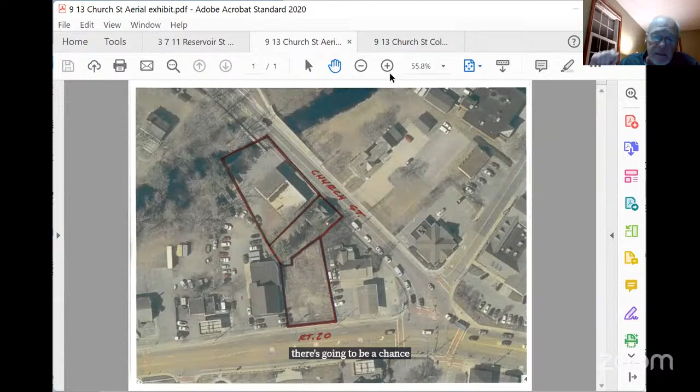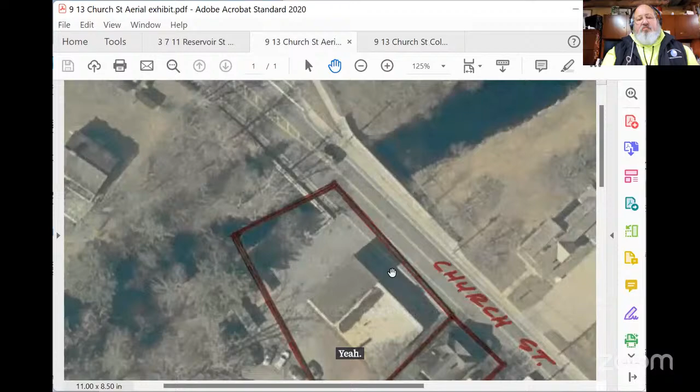The point that Justin brought up is good, because one of the questions I had was once you have this flat piece of land and the buildings are gone, there's a chance you're going to have Dunkin' Donuts cups and any sort of refuse or trash blowing into the river. But if we leave up the erosion control device for a while, that may capture that. Sure, the erosion controls are going to stay. It's the chain link fence surrounding it that would be gone for a little bit. The former RT Furniture site currently has fencing, and that will stay.

All right, any more comments from the commission? Questions, concerns? Let's take a look if we have anybody from the attendees. I don't see any hands up. Going once, twice, three times.

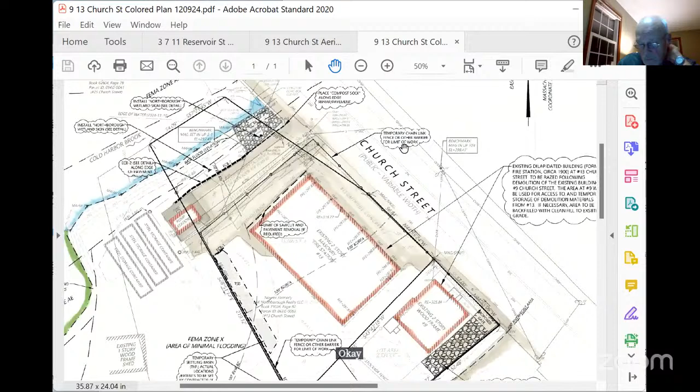Okay, so we're going to close the hearing, and Vinny, it sounds like we're going to vote on a negative determination with any special conditions, just to have the sediment controls inspected prior to beginning work.

Okay, as soon as those are installed, we'll give you a call, Vincent. Yep.

All right, we need a motion to close the hearing on 9-13 Church Street. So moved. Is there a second? Second. Kelly, you're 100% tonight. Roll call vote: Justin Dufresne, yes. Todd Helwig, yes. John Johnson, yes. Kelly Marston, yes. I vote yes.

Hearing is closed. We need a motion to issue a negative determination of applicability for 9-13 Church Street with any special conditions as noted by Vinnie, I think we're minimal. So moved. Is there a second? Second. Roll call vote: Justin Dufresne, yes. Todd Helwig, yes. John Johnson, yes. Kelly Marston, yes. And I vote yes.

Okay, so thank you all. Thank you, everybody. When will you start work?